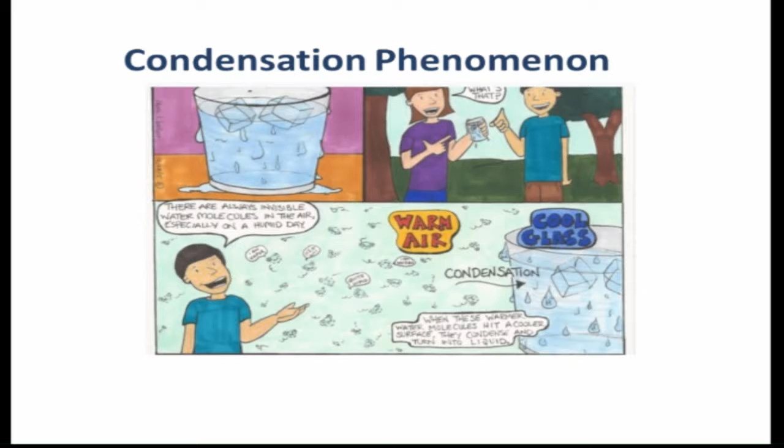Another phenomenon that you can notice is the water condensation, in which the water changes from a vapor phase to a liquid one. Some formulas are described by this phenomenon. You can notice this phenomenon when you hold a glass with some ice in it, and after some time holding the glass, you will notice that some water droplets are formed around the glass. This means that the water in the air condenses and accumulates on the glass. Here is an animation of how the droplets are formed in real time.

Now that you know that chemistry is everywhere and that mathematics translates a phenomenon into something mathematically tangible through formulas, a chemical engineer learns how to manage and transform fluids such as water to do a work or to create a product that the market needs. You will study the industrial processes and fundamentals to do that.

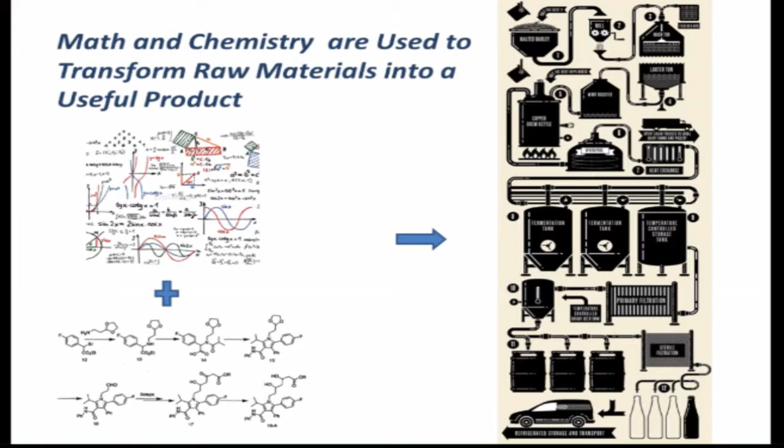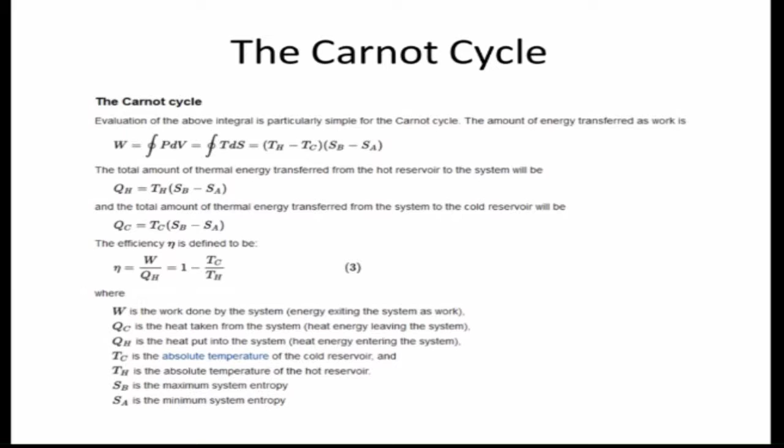You will study the Carnot cycle, which is a process in which you apply condensation and evaporation fundamentals to produce a tangible work, such as that of a refrigerator. The refrigeration cycle is the reversed Carnot cycle, so it will be very important for you to understand this topic. We will explain this topic to you very briefly.

You will learn that a real refrigeration cycle functions with four main components: an evaporator, a compressor, a condenser, and an expansion valve. The condenser and evaporator follow the fundamentals we explained earlier to adapt the physical and chemical conditions of a substance.

You can see in this image what the refrigeration cycle is composed of, and you can see how a substance enters the compressor as a saturated vapor and is cooled to the saturated liquid state in the condenser, and then it is brought to the evaporator pressure, and it evaporates as it absorbs heat from the refrigerated space.

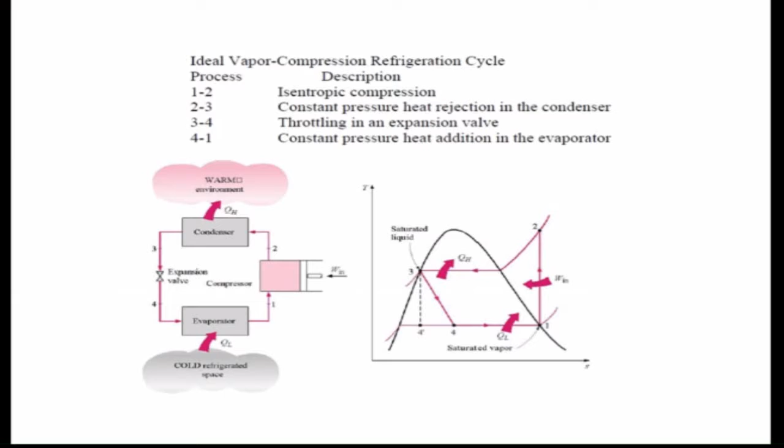You will not understand completely what we are talking about, but the important thing to notice is that a fluid has properties and graphs that you will be able to understand when you study the major degree in chemical engineering. You will also study how to identify the phase and conditions of a substance in an industrial process.

You will also learn about the temperature-entropy graph, as we can see here. And there are many other tables that will help you to transform raw materials into something useful, but the ones mentioned here will help you to learn more about the refrigeration cycle.

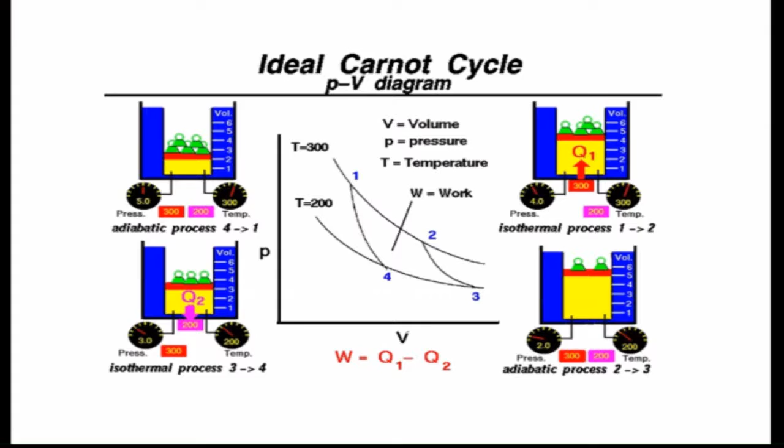So once you learn the chemistry and mathematical fundamentals of different phenomena, and that you can monitor and manage raw materials through graphs, you will start integrating all the knowledge into a process to transform raw materials into tangible products. You can now see that we can use different machines and fittings to apply the fundamentals of the refrigeration cycle, such as a valve, here it is, a condenser, here it is, an evaporator, here it is, and a compressor.

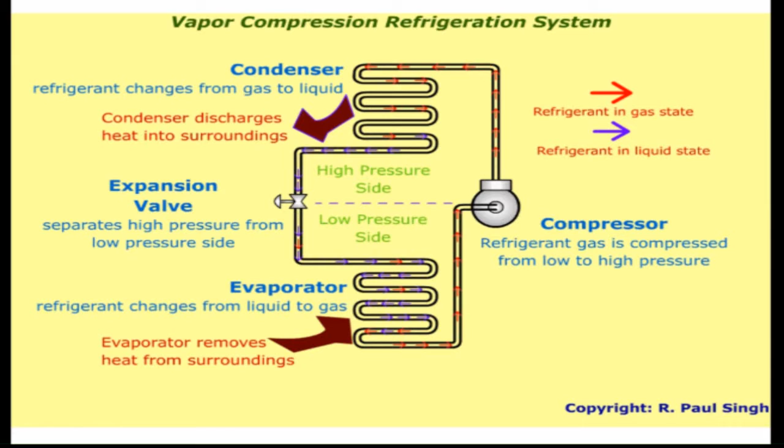Also, you can see in this image how a substance follows the refrigeration cycle and changes from the vapor phase to the liquid one. Here the red and purple arrows identify which phase we are talking about. The refrigerator is an example of equipment that freezes products in our home, and it is a real application of the fundamentals that we have explained in this tutorial video.

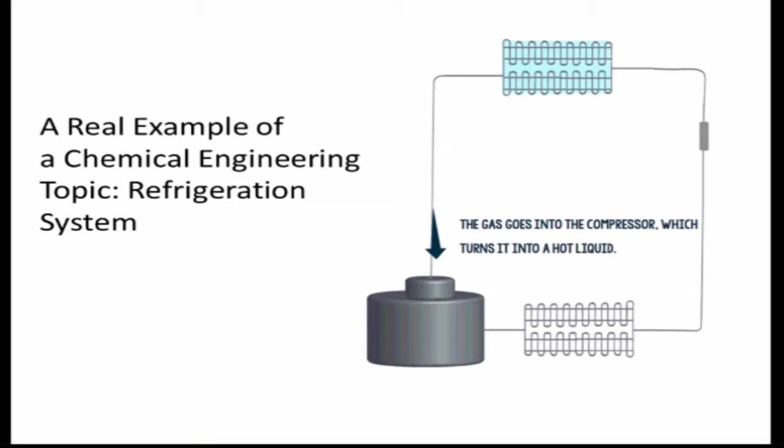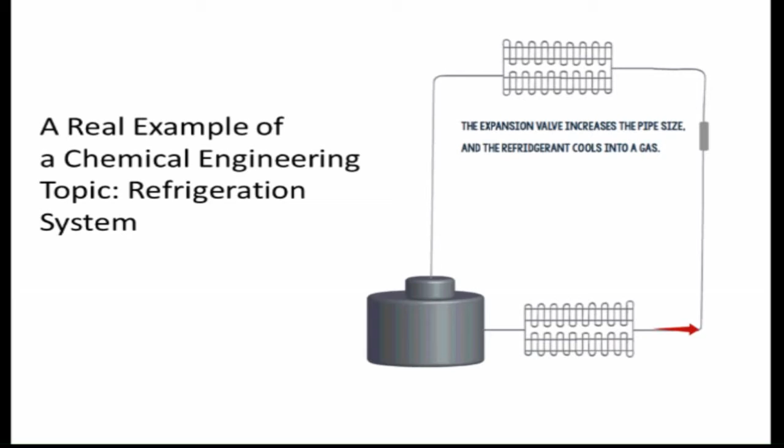We can see in this animation how the refrigerant flows through the refrigeration cycle and it freezes. Here you may notice how the fundamentals that we have discussed earlier are integrated. Here you can notice how the refrigerant flows through the refrigeration cycle.

Of course, real applications are much more complex, and there are many other formulas that are involved. Please note that this is a brief explanation, and there are many other details and interesting topics that you will learn in this major. We wish you good luck, and we hope that you select the right major.